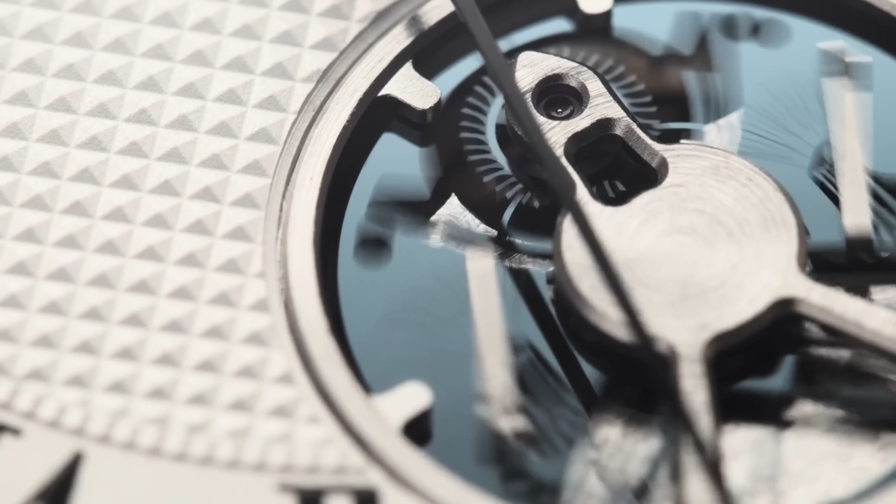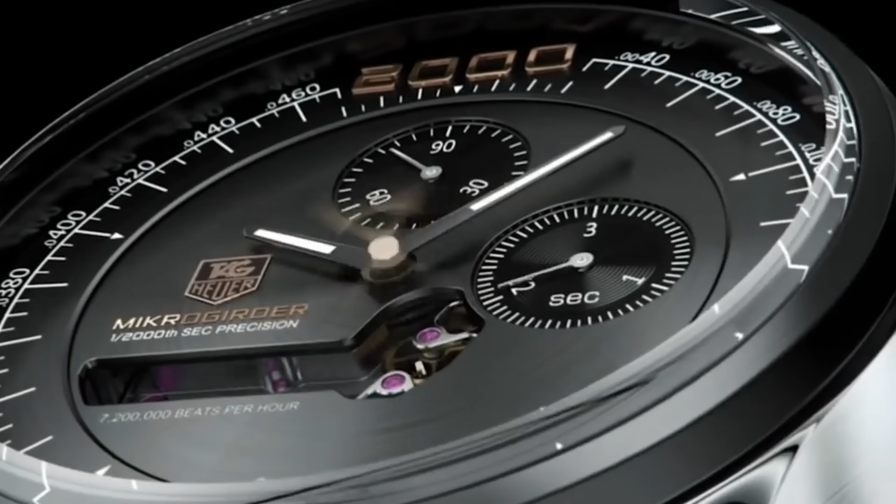Sometimes, while the old men are napping, new notions come out to play. They're few and far between, but in the brief moments they exist, they can be some of the most bonkers things you've ever seen. So here they are, those most ridiculous ideas, laid out for your amusement. Stay to the end for the ultimate cooking hack.

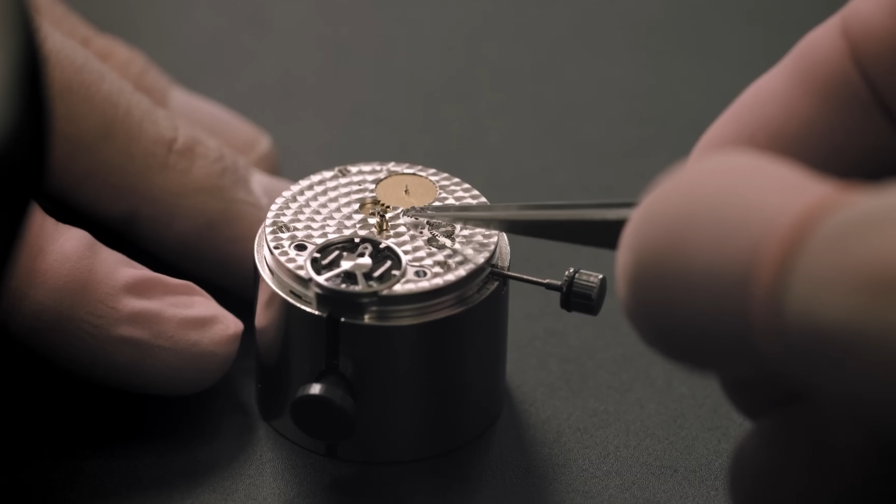If there's a brand out there that couldn't be more old man if it wore New Balance walking shoes and put 2 spaces after a full stop, it's Frederique Constant. The weird thing here is it's actually relatively young, younger than I am, and yet it's been cosplaying as elderly since the day it was born. I suppose it makes sense, really. The best and most expensive watchmakers really are the oldest of old men, and so the aesthetic comes with a certain credibility that can be quite appealing.

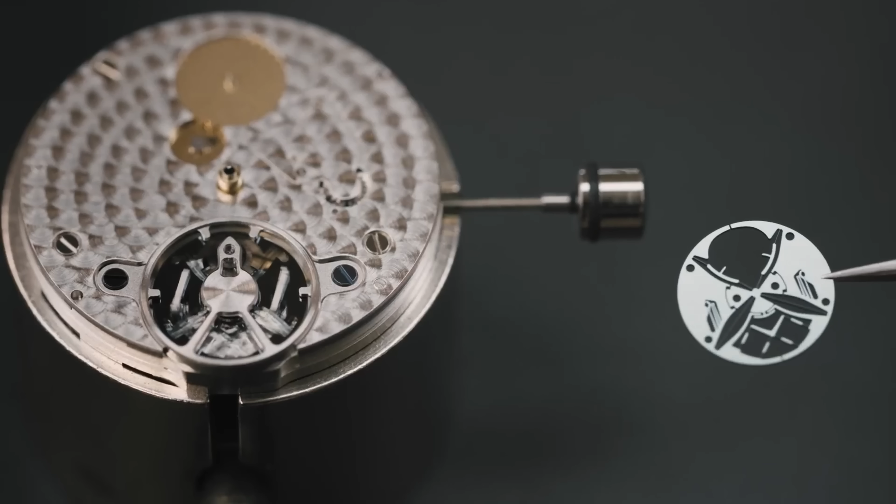So when Frederique Constant slapped us about the chops with the absolutely mental Monolithic, we were all a bit taken aback. Grandad got a new pair of shoes, and it looks like they might be of the Nike Mag self-lacing variety. At the heart of every watch is its escapement, which is most easily understood as a mechanical capacitor. To prevent the big mainspring winding down as fast as it can, the escapement allows just a small amount of energy to be released in discrete repeating increments.

The current solution to this particular challenge has been in popular use since 1769, so naturally Frederique Constant thought it was high time to try something else. Every time it's always chicken chow mein and pork fried rice. They wanted to taste the rainbow.

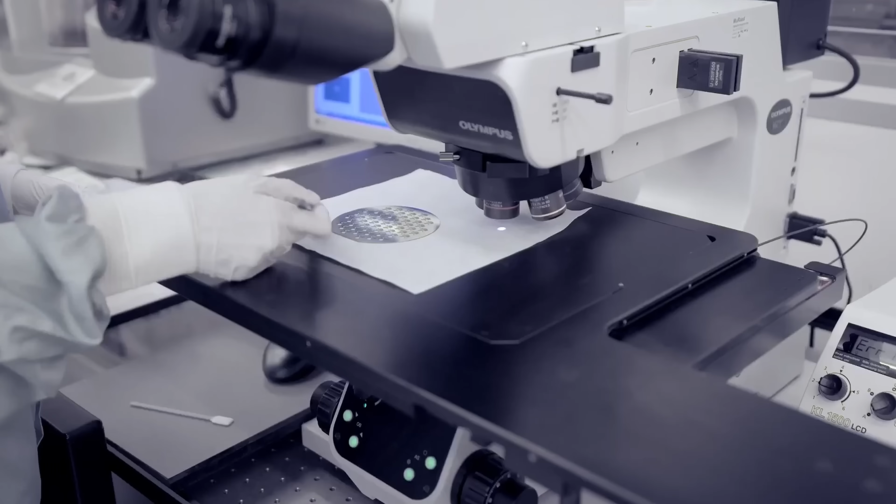In 2001, another watchmaker, Ulysse Nardin, we will be hearing more from them later on, wondered if computer chips might make a good material for watchmaking. And it turned out that yes they do. Not only can silicon be used to replace existing components in a standard escapement, being lightweight, almost friction-free and anti-magnetic, the ability to make highly complex elastic structures with it as well opened up the door to some properly out there thinking. Case in point, this Frederique Constant Monolithic.

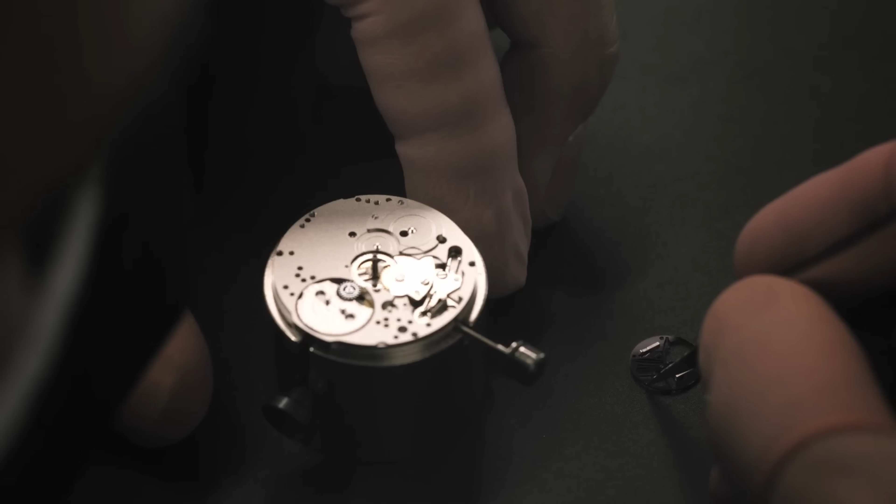Combining both the balance wheel and pallet fork of a traditional escapement, and with 2 adjustable weights either side to dial it all in, the Monolith buzzes like a wasp with an Uzi, the alien structure flexing at 8 predetermined points, each thinner than one of the thinning hairs on my thinning head. And that's just the beginning. As we'll continue to see, the combination of silicon's precision plus the recent ability to model complex compliant mechanisms in simulation makes for some very interesting creations indeed.

But why would anyone except Skrillex want those controlled beats going so much faster? Enter the oldest of old man watchmakers, Breguet, to offer up an answer. Back in the good old days of pre-industry and diphtheria, watches, like the ones Breguet made, used to beat slowly, since the metal alloys used for the mainsprings back then weren't up to the task of lasting long enough.

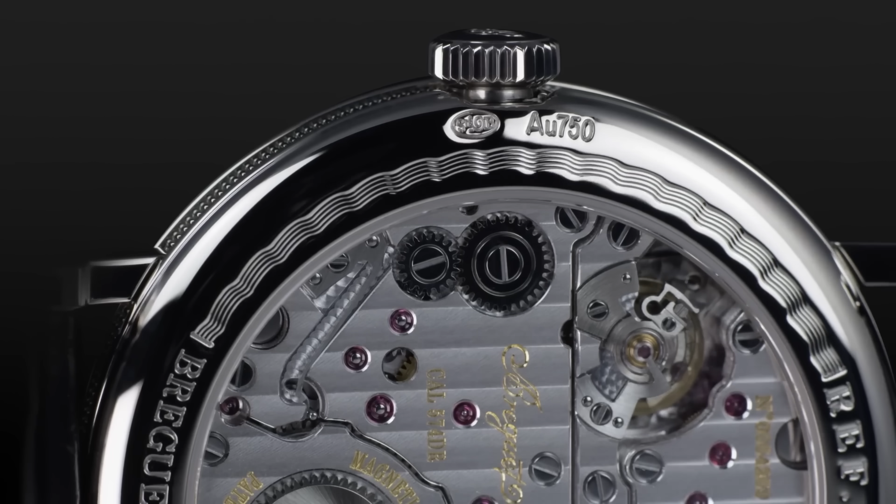We've all been there. Whilst 28,800 beats per hour is today pretty commonplace, pocket watches of the 18th and 19th century ran at anywhere from 18,000 beats per hour all the way as low as 14,400. The clever sausages in the room will have noticed those are all divisible by 3,600, the number of seconds in an hour, offering up from 4 beats per second to 8 for the modern day watches. This frequency can also be measured in hertz, which is read as half the beats per second, since the escapement only achieves a full cycle every 2 beats.

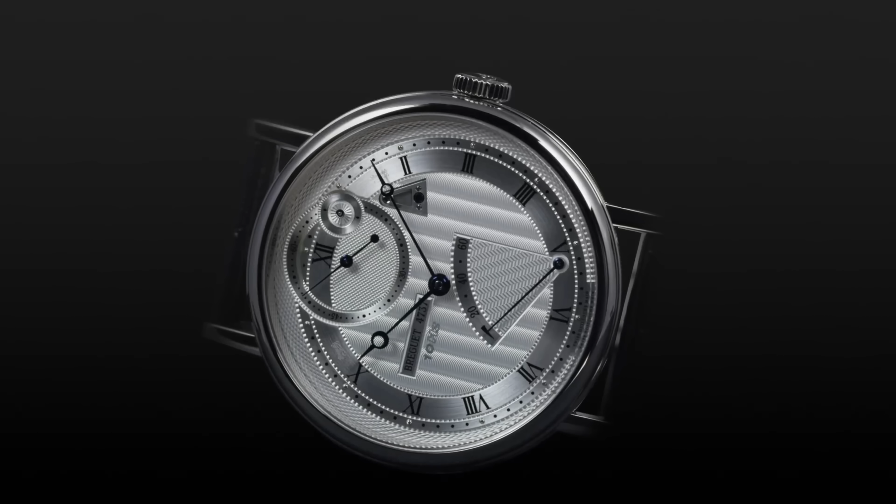Crotchety old man Breguet, when not shooing the neighbour kids off his lawn, spent time pondering the exact nature of watchmaking, and frequency was one of those topics. If you've ever learnt to ride a bicycle, you'll understand intuitively that the faster you go, the more stable you become. The same is true of a watch's balance wheel.

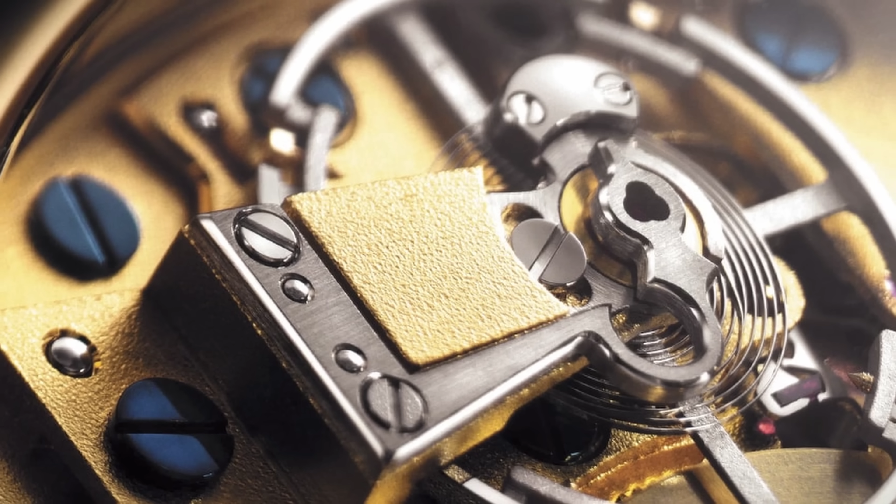Go slowly and one small bump and it'll be knocked off its axle, and then it's grazed knees and tears all round. Breguet partially solved the problem with his parachute shock absorber system, a springy dingle that absorbed bumps up through the axle, but that only got him so far. It stopped the balance wheel breaking, but didn't stop it, well, stopping. For that, he needed to channel his inner Jeremy Clarkson to summon more speed and more power.

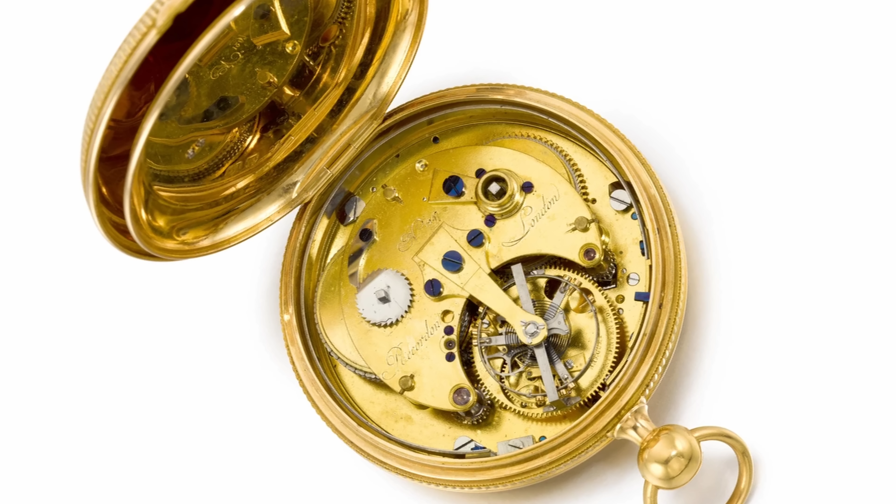In a watch built in 1808 for King George III, Breguet whipped up a rocket ship that packed in a thicker mainspring for a blazing 21,600 beats per hour, 6 beats per second, or 3 hertz.

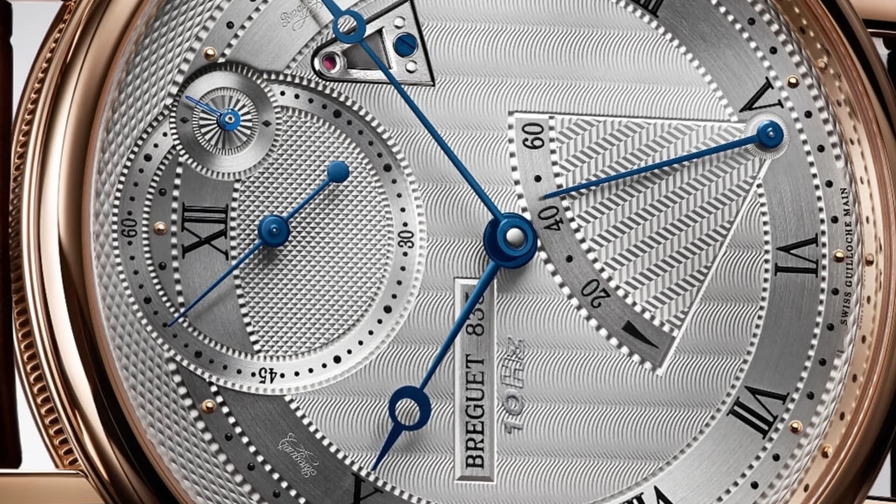And whilst actual old man Breguet is now keeping the worms company, the business has continued to pursue the goal of increased stability, using a methodology even science doesn't truly understand: the healing power of crystals, the magnetic force of magnets. You see, not all of that juicy power from the mainspring actually makes it through the movement, because much of it gets eaten up by greedy friction.

When a watch is measured on a timing machine, amplitude, the total angle of the balance wheel's rotation, determines how much of that power is actually making it all the way through, with friction along the way from the various wheels within it, and its complications, sapping it a bit at a time. It's like a brain teaser for watchmakers, trying to achieve what they want without using up all that precious amplitude.

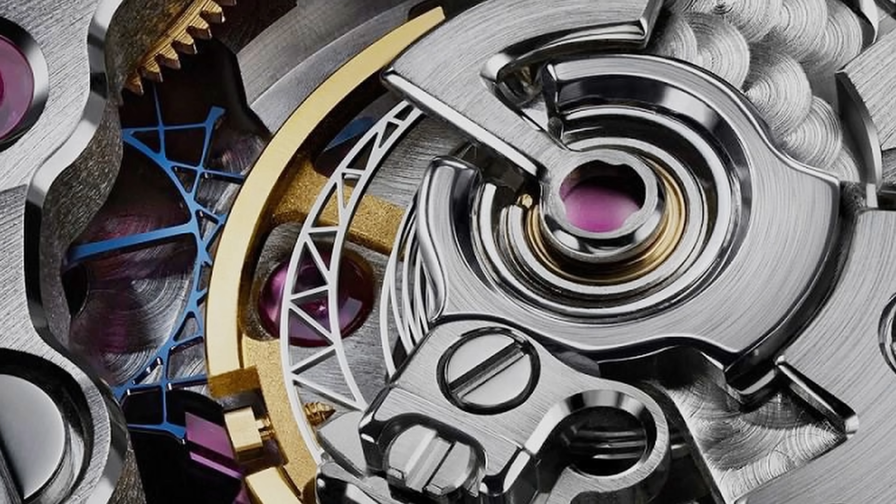One of the biggest culprits in this friction sink is the balance wheel itself, and so Breguet, for the classic Chronométrie 7727 10Hz, which runs at a whopping 20 beats per second, chose to suspend it with magnets instead of seating it in typical jewel bearings.

One side touches the magnet with just the tip, whilst the other side is completely free-floating, which also provides additional shock resistance. But wait, a magnetic attraction minute!

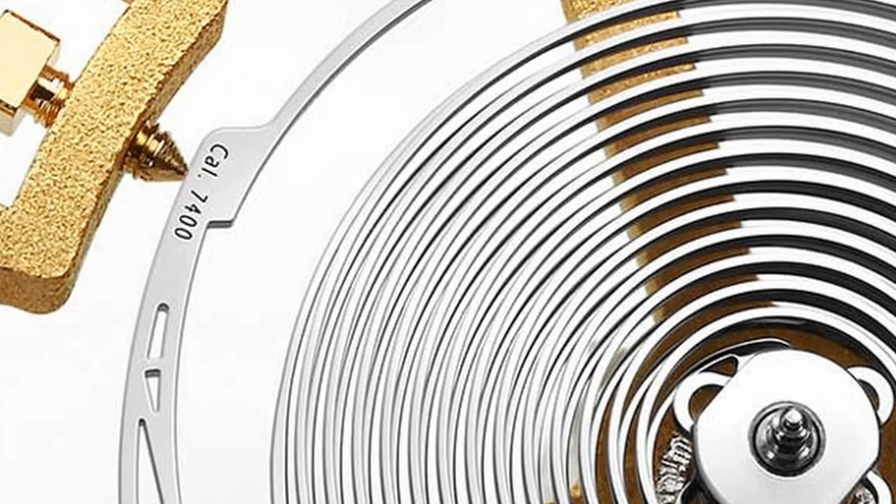Aren't magnets supposed to be the sworn enemy of watchmaking, binding delicate parts together such that you must take time out of your day to visit your local watchmaker and have it demagnetized? Ordinarily, yes, but Breguet wriggled free of that particular sticking point by equipping the watch with an anti-magnetic silicon escapement, including hairspring. The old dog's learnt a few new tricks.

If you were to think off the tippy top of your head which watchmakers waged the technological war closest to the bleeding edge, it probably wouldn't be Patek Philippe you'd think of, except these wily coyotes have been around the block long enough to know a crate full of Acme quartz when they see it.

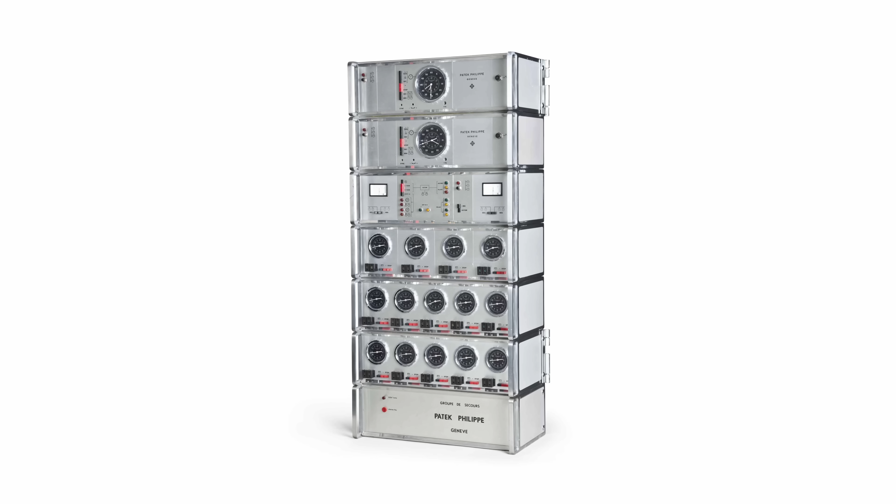Preserving a company like Patek Philippe inherently means experimenting with future tech, if anything as an insurance policy, with the famous watchmaker's history dotted with unexpected creations like electronic clocks, quartz watches, and, just in case, a lifelike painting of a tunnel. The great irony is that its electronic master clock operation, which furnished the likes of TV stations and airports with pinpoint accurate timekeeping, was the part that ended up obsolete as GPS timing took over.

But plucky Patek Philippe didn't give up, and in 2005 began its advanced research program to investigate modern materials and techniques, starting with the material silicon to eventually create a full escapement out of the stuff, inclusive of the pallet fork, escape wheel, balance and hairspring, everything.

The Aquanaut Travel Time Advanced Research 5650G upped the game with the inclusion of Patek's most complex advancement yet, a compliant mechanism reducing the component count in the travel time pusher mechanism by over 3 times. Except this time, it wasn't in silicon.

The problem, as Patek Philippe saw it, with silicon was that it could not be hand-finished in the same way steel could. So they decided to make a complex, highly intricate component ideal for silicon out of steel instead, just so they could make it look real pretty.

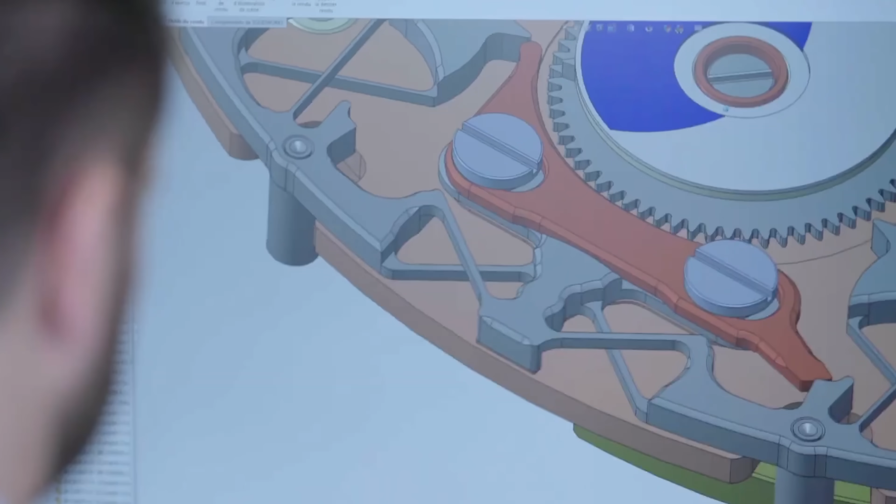This is one of the best examples of the oxymoronic nature of modern watchmaking, introducing innovative new ways to do something as outdated as the medicine at the back of the cabinet. And the more we look at this particular innovation, the more head-scratching it becomes.

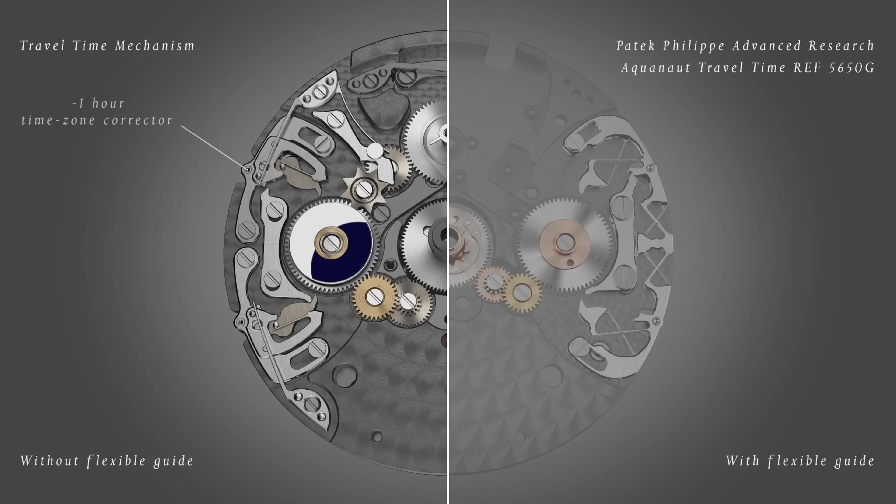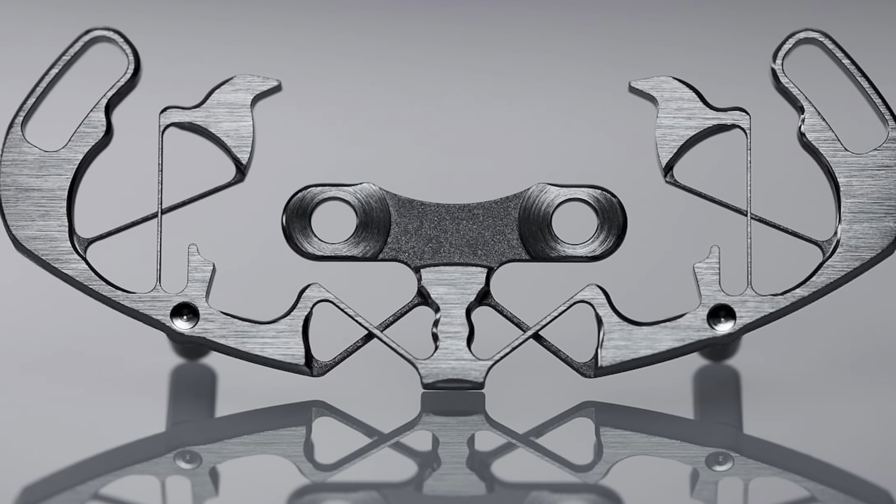What at first looks like a simple single layer turns out to be two, with four skinny angled blades crossed by mirrored versions on the layer below. They're entirely separate of each other, flexing to allow the transmission of movement from the pusher to the mechanism, leaving a gap between them of just 150 microns. You couldn't floss it with a pube, and I wouldn't suggest trying.

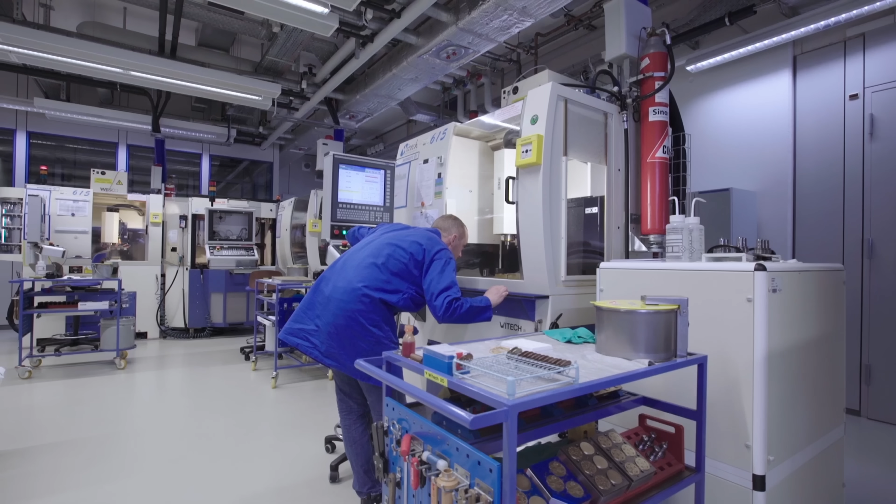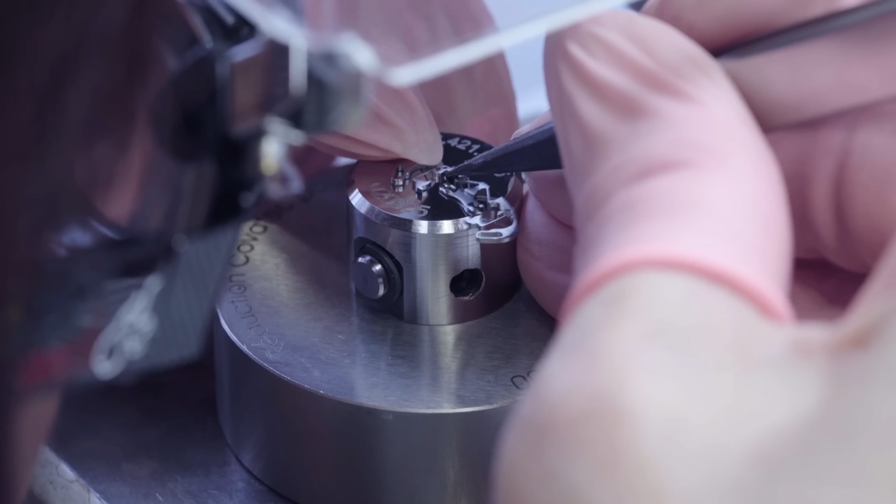How Patek Philippe achieved this is still something of a mystery, the company not delivering on its secrets. There's speculation it's EDM - that means electrical discharge machining. But that process uses a wire, so the complex overlapping shapes wouldn't be possible. Perhaps they're 3D printed, or layered, or perhaps Thierry Stern is a robot from the future where squares have been banned, and he's been sent back in time to put it right.

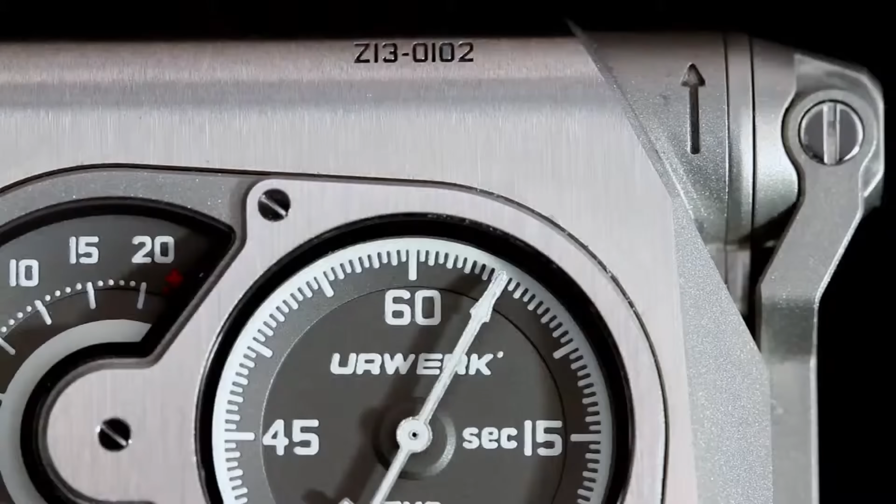The pursuit of precision is the scourge of any watch brand worth its wind, a constant battle to compare itself to the unrealistic standards of a cheap $10 quartz. Chasing this new paradigm achieved by such lowly means could drive a watchmaker mad, and that's why Urwerk took the 'f it, you do it then' approach to high horology and created the EMC.

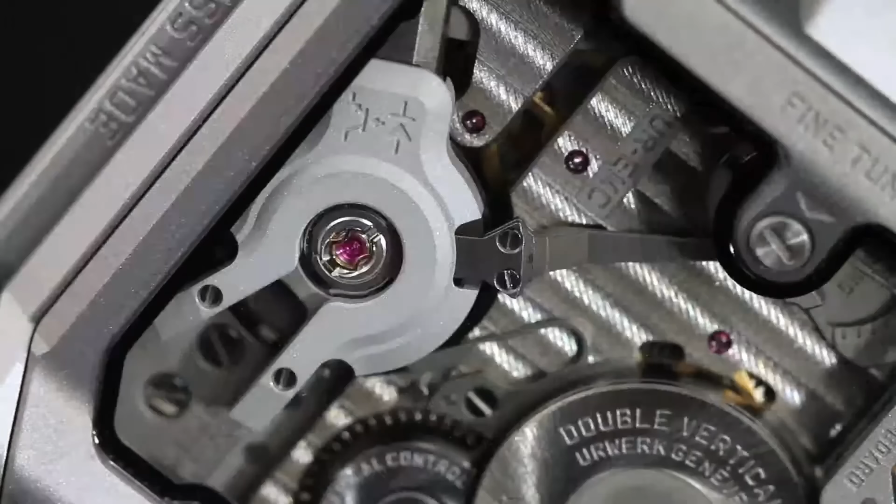Built inside this 80-hour power reserve caliber isn't just a watch movement, but an electronic companion as well, a digital nanny keeping tabs on its horological responsibility, giving it the appropriate title Electromechanical Control, or EMC. Think of it like a probation ankle tag, but for mechanical accuracy.

Press a button on the side and the dial that isn't the seconds, hours, minutes, or power reserve will spring into action, reading out the current accuracy of the watch to within plus or minus 20 seconds per day.

Behind the scenes, an optical sensor reads the ARCAP balance, ARCAP being an alloy developed for high-precision machining typically required in scientific applications, and compares it to a built-in quartz movement, powered by the same twin-barrel mainsprings winding the rest of the watch. I'm not sure which is more ridiculous in this watch, how the power is wound into those mainsprings or how it is converted into electrical energy.

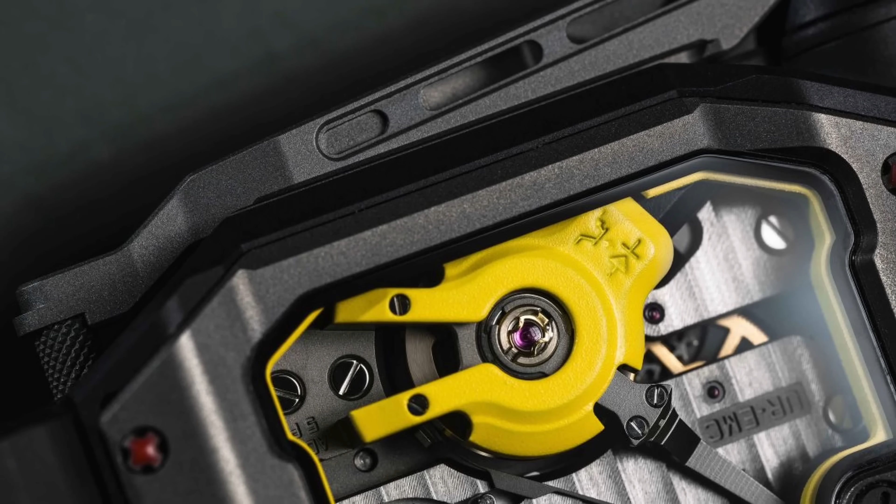So I'll just tell you: a fat crank handle on the right hand side of the watch, like what they used to start up old-timey cars with, is how the power is delivered. How the power is converted, that's via a micro-rotor generator provided by Maxon, the same people who gave not only the Mars Perseverance rover its motors, but the Ingenuity helicopter as well, the first to fly on an alien world.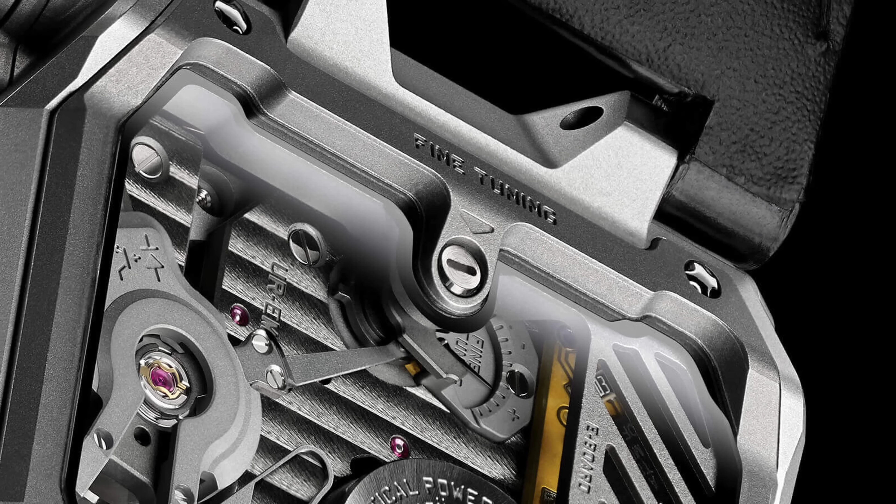What of all this technology though, if just to tell you your watch is keeping shit time? Seems kinda pointless. So Urwerk added one last feature to the EMC, what is perhaps the largest crack in the watchmaker's sanity, a screw. It's usually a screw that's only accessible to the watchmaker regulating the watch, but now it's available to you as well.

Twist it one way or t'other and the watch will beat faster or slower, with the net result of its user's inevitable ham-fisted fuckwittery proudly displayed dial side for all to see.

If I were to hold a Bergeon strap-changing tool to your temple, one of the cheap, scratchy ones, and ask you to pick the least innovative old man watch brand you could think of, perhaps you'd come to the conclusion that the grumpy Frenchman Cartier is indeed that candidate.

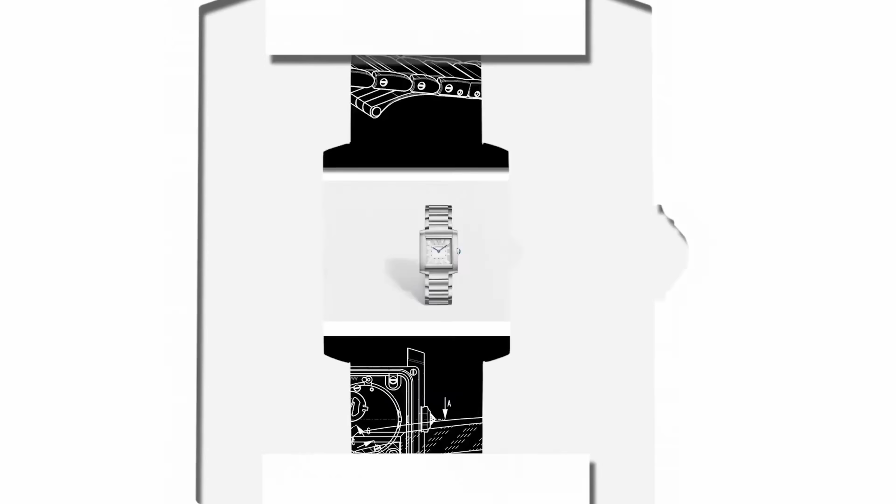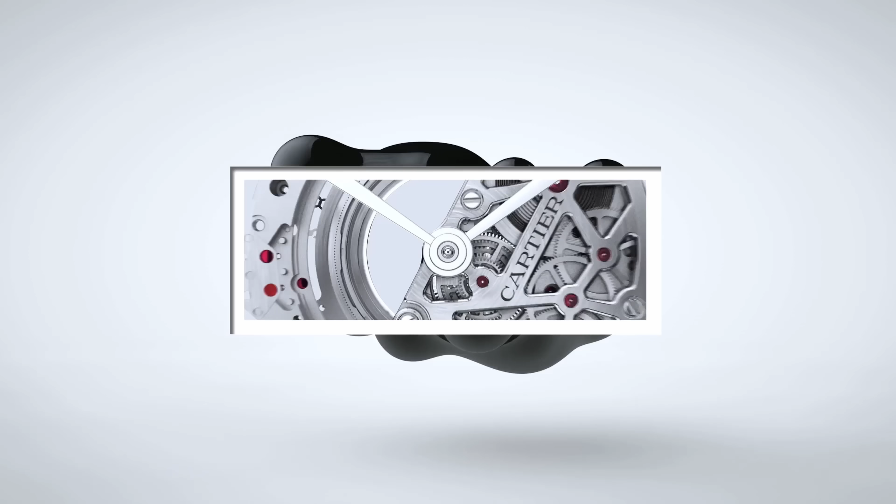In terms of design, they charge ahead of the rest of the pack, producing shapes at varying degrees of viscosity. But when it comes to watchmaking innovation, they pretty much take a back seat and let everyone else do the talking. Or do they? There was of course the recent Masse Mystérieuse, with the only thing more challenging to understand than its spinning self-contained movement being the spelling of its name. However, in terms of innovation, that was more a new idea using existing knowledge.

I'm looking for the stuff they put together in a clean room, in hazmat suits, and keep in the fridge next to the smallpox. And lo and behold, Cartier did indeed oblige with the ID Concept series, two watches designed to imagine what watchmaking might have been like if watchmakers spent more effort innovating than cultivating waitlists and courting Timothée Chalamet.

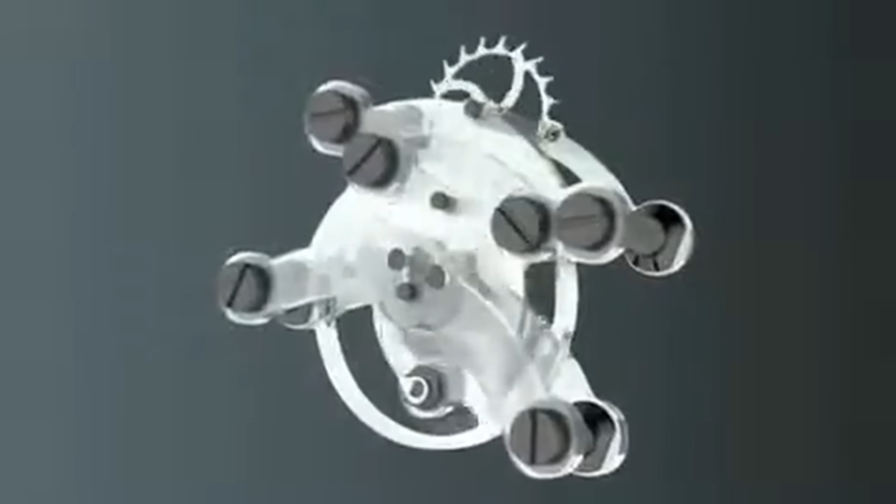The first watch, the ID One, was drier than a nun's chuff, on purpose, requiring zero lubrication whatsoever to operate. Modern synthetic oils last a very long time, but back in the day, natural oils had a nasty habit of breaking down and turning sludgy, which is why watches needed servicing more often back then.

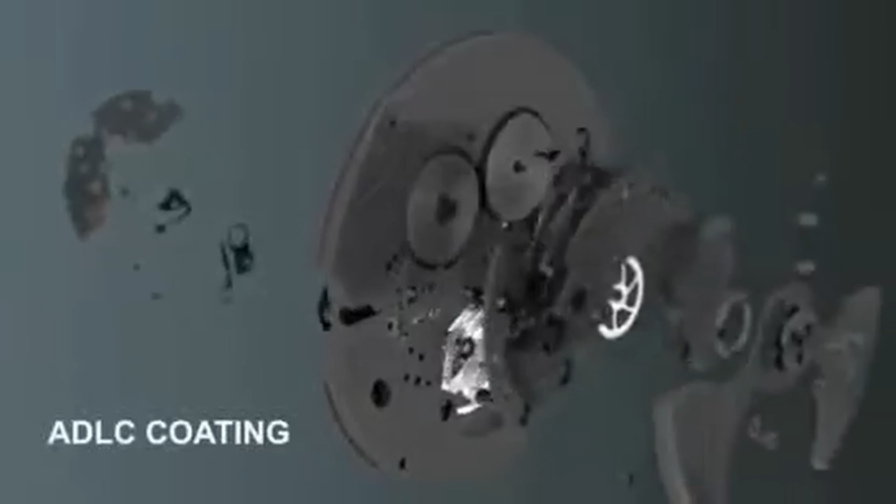The ID One imagined a world where gears could bump and grind together free of the slippery stuff, and this was achieved through the use of carbon crystal. Hang on, isn't the crystalline form of carbon normally called diamond? Yes, and that's what Cartier used for the balance wheel, escapement, bridges, and almost the entire gear train.

Not only does diamond not require lubrication, it can also be artificially produced using deep reactive ion etching, which you don't need a degree in rocket surgery to appreciate is very, very precise. Which also meant the watch needs no calibration either, no fiddling with the regulation to get it bang on. Slap it together, dry as a bone, and it spits out timing graphs that'll give a quartz crystal cause to take out life insurance.

That's already a pretty spiffing endorsement of Cartier's watchmaking capabilities, but there's little point in calling a watch ID One if there's no intention to make an ID Two, which Cartier did.

Building on the concept of imperious efficiency, the nerdlingers at Cartier HQ wondered if this thinking could be interpolated from the long-term operation of the watch and into its day-to-day usage. After all, if a watch is no longer getting bogged down by friction, it should be able to keep on running like Forrest Gump with a Duracell up his butt.

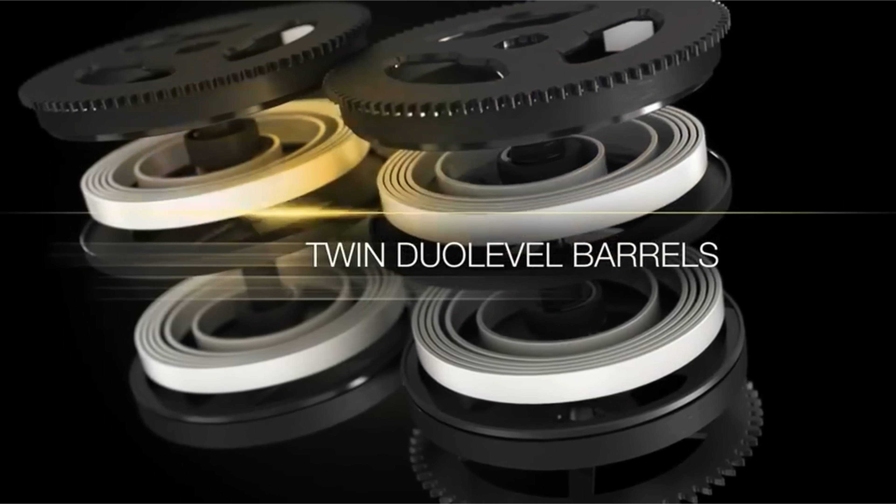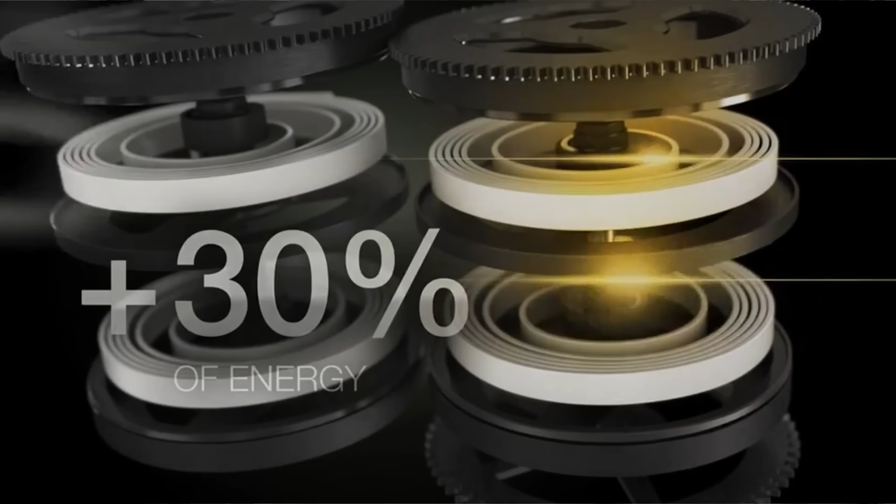So for the ID Two, Cartier kept the carbon crystal escapement, which was friction-free and lightweight, and added two stonking great barrels filled to bursting with fiberglass mainsprings, two per barrel for four total. Why fiberglass? With a polymer coating, they're also frictionless and require no oil, thus extracting more energy from them, not to mention the incredible ability of fiberglass to store elastic energy.

That's why it's used in pole vault poles and Lotus cars, where one is only expected to move a person a few feet down the track before being abandoned, and the other is a pole vault pole. The power from these mainsprings is so high that a planetary gearing system in diamond-coated silicon was created to spread the load over more teeth and stop the whole thing going bang like a lightly used K-series.

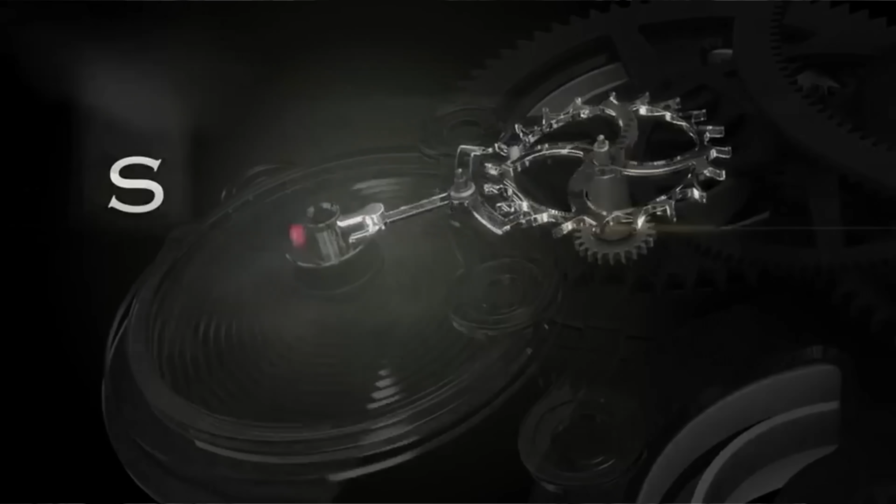But there was more performance yet to be extracted, not in the movement itself, but in the everything else within the case: air. Yes, Cartier sucked that case like they owed it money, leaving it all but 0.02% free of the life-giving gas. That clear ceramic case back isn't glued into place. That vacuum is holding it there.

How much did Cartier manage to eke out the power reserve? 10 days? 15? 20 even? A whopping 32. Perfect for covering any month with a day left over. Although useless in 46 BC when Caesar temporarily added the 33-day month Undecember and the 34-day month Duodecember. Checkmate, Cartier.

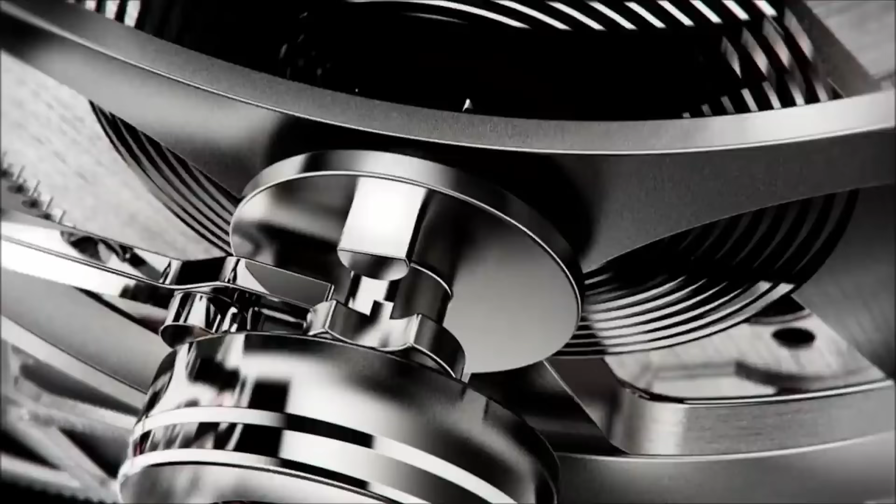If you're not into Formula 1, then first, boo, and second, at certain speeds, springs just can't physically coil and uncoil fast enough. In Formula 1, pneumatic valve springs were introduced, air-inflated bellows replacing traditional metal-coiled springs that allowed engine speeds up to 20,000 RPM.

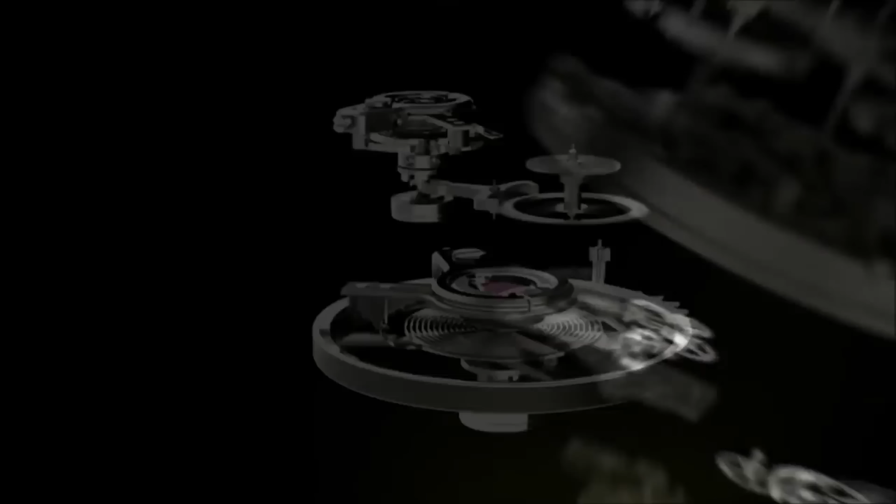For the Tag Heuer Mikrogirder, a similar level of lateral thinking needed to be applied, and this part will blow your mind a little bit, to measure speeds almost 10 times faster than those screaming V10s. And so the story goes, a Tag Heuer engineer was sat at home trying to think of a way to overcome the physical limitations of the balance spring, when his contemplative streak was rudely broken by the twang twang twang of his young child flicking the sprung doorstop.

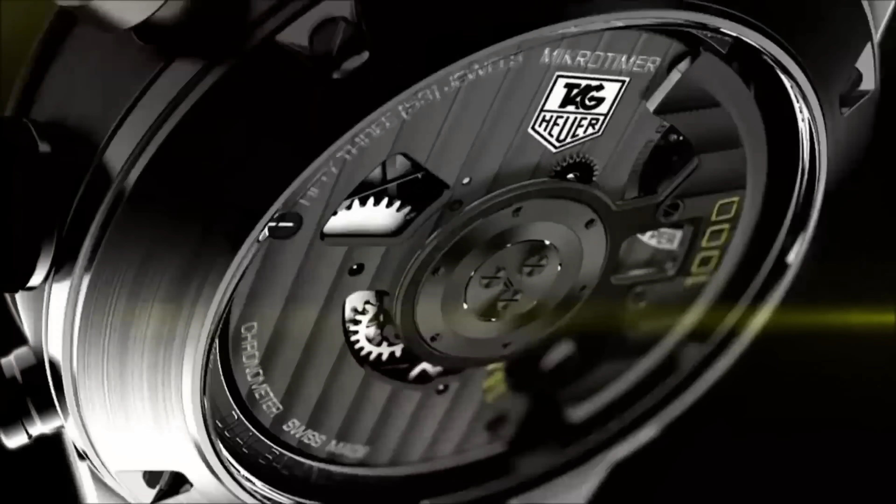It was his eureka moment. Or it would have been if it were actually true. Still, the sprung doorstop analogy is the perfect way to visualize how the problem was solved. When you twang one of those suckers, not only does it fill you with childish glee, it also returns to dead center and even overextends in the merest wisp of a flea's hiccup, bouncing back and forth over and over.

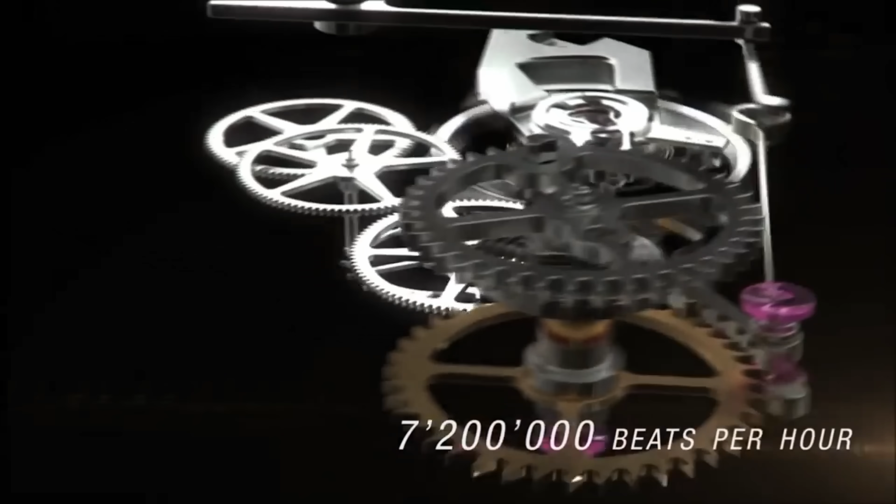And that's exactly what the Mikrogirder is, a linear oscillator that twangs back and forth 7.2 million times per hour. At that rate, the large chronograph hand circles the entire dial 20 times every single second, which, if you can't imagine it, is like sticking the hand on the end of a drill and then squeezing the trigger.

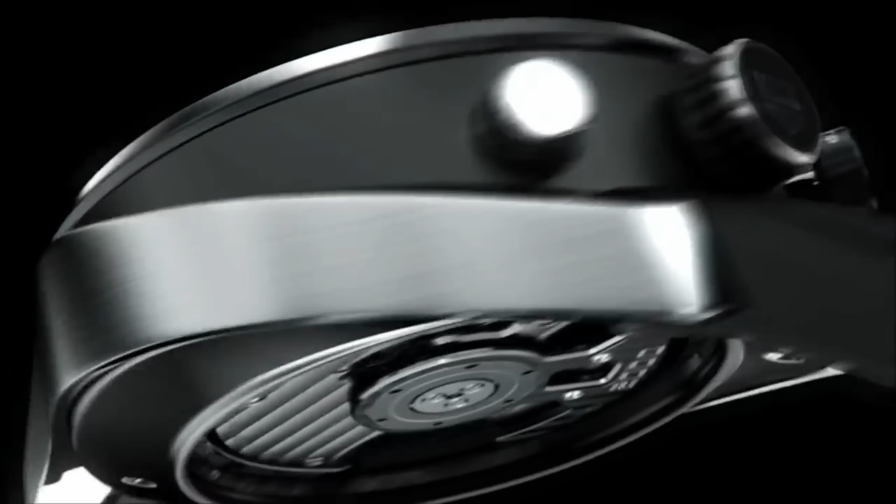Now, you may have also seen a Tag Heuer proudly displaying 10,000 at the top of the dial and be wondering how they broke the 10,000th of a second barrier. But that is in fact a completely different innovation from the house of Tag Heuer known as lying. It's the same 2,000th of a second movement rebadged as 5/10,000th of a second instead.

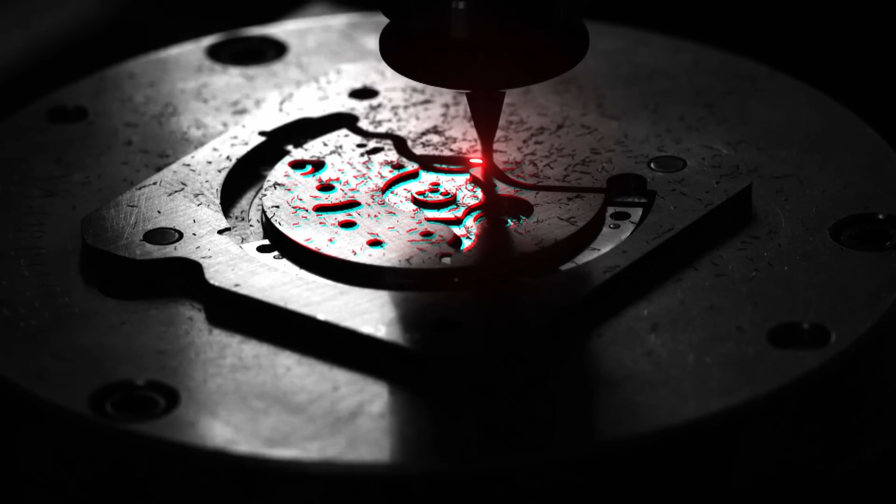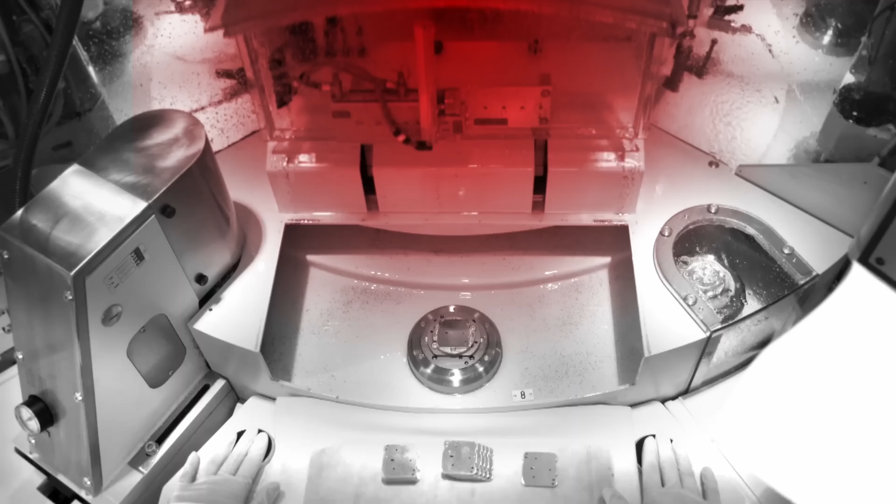To really understand it, I think it requires, in true me fashion, some long, rambling context. As I'm sure it's painfully obvious to anyone who's accidentally stumbled in here from the modern world, all of these solutions have been solved by computers, and that friction, power reserve, lightness, and precision are all antiquated challenges that the rest of the world has long since moved on from.

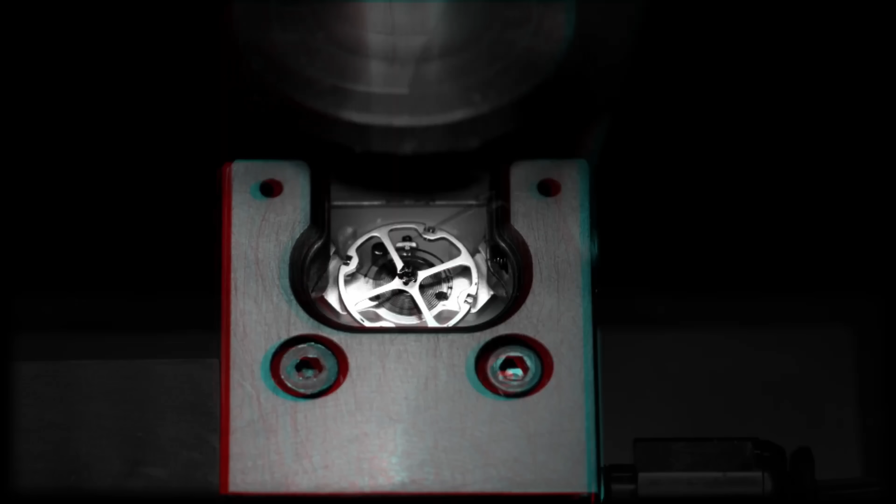There's more advanced management of physics in Rocket League than there is in the entirety of Patek Philippe's advanced research collection. But nevertheless, it continues to be done because not everything needs a reason beyond, I wonder if we can, and that's where the origins of silicon in watchmaking really emerge.

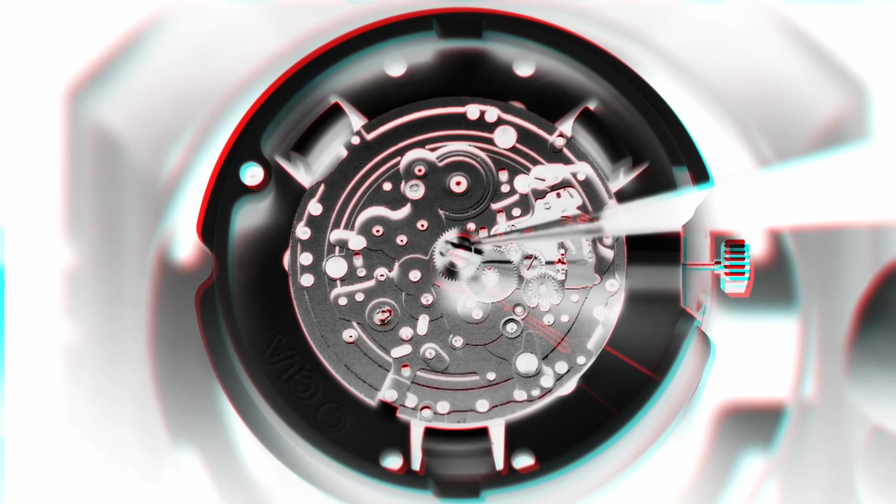When electronics had signed an eviction notice on mechanical watches, it was a scramble to see if this trade could be repurposed in any other way, or perhaps appreciated on a different level.

Ulysse Nardin's Rolf Schnyder, who performed business CPR on it as it teetered on death's door, subscribed to the emerging idea that mechanical watchmaking could evolve to become an artisanal appreciation rather than a practical one, and he wanted to get ahead and usher in that era with a bang on the scale of the universe. A big bang, so to speak.

He originally had the idea of bringing back Ulysse Nardin with something impressive like a minute repeater, but when he went to visit his friend and genius watchmaker Jörg Spöring, he was struck by the astronomical clock hanging on the wall. That was it. He wanted the entire night sky on the wrist, the most complicated astronomical wristwatch ever made.

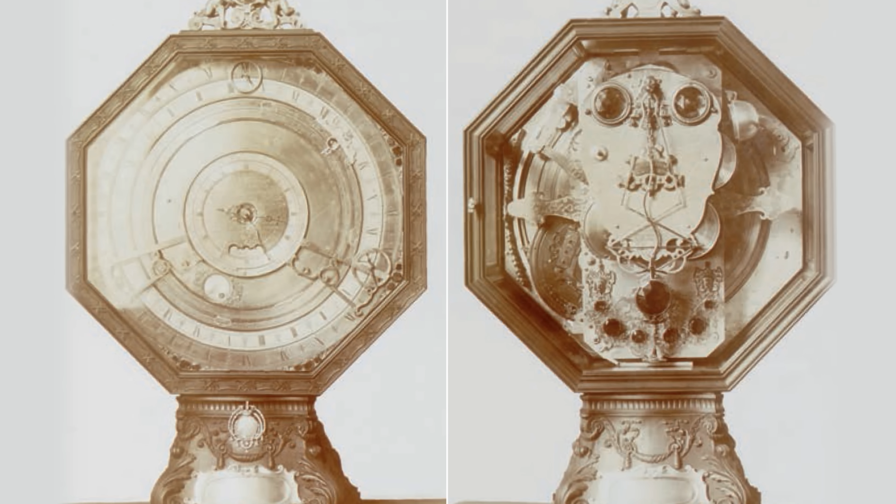Jörg promptly informed him that the clock was not the work of his own hand, but his apprentice, who had decided to spread his wings a bit by offering to fix the Vatican's astronomical clock, which had been broken for centuries, with almost no experience, and despite the clock being deemed unfixable by many masters before it.

Rolf set off to Italy to find this overconfident apprentice, to discover that he had indeed brought the clock to working operation. By taking the clock entirely apart, the apprentice had come to understand it and was able to reassemble it successfully and didn't even have an extra part left over at the end.

Rolf asked the apprentice if he would build him an astronomical wristwatch. The apprentice was confused.

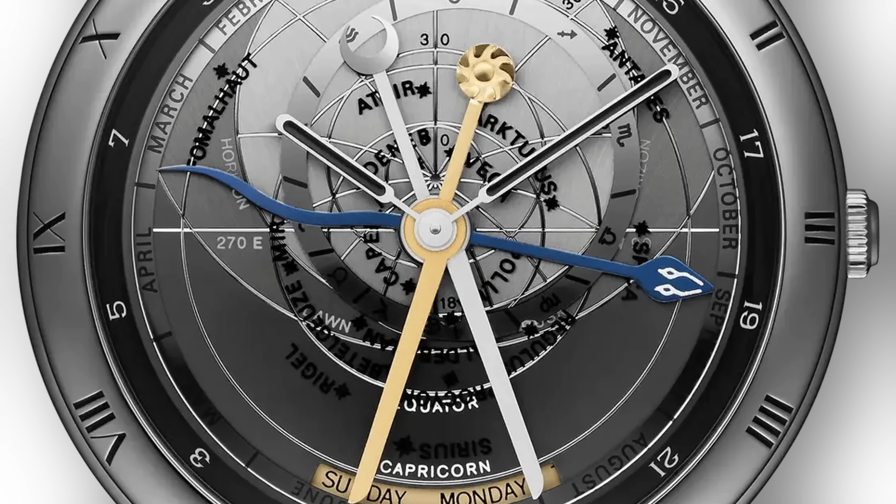Why have the incredible accuracy of an astronomical clock and indeed the universe in a watch too small to read it? Rolf assured him that, for the buyers of this kind of watch, that wouldn't be an issue. And that little boy who fixed the Vatican clock grew up to be Ludwig Oechslin.

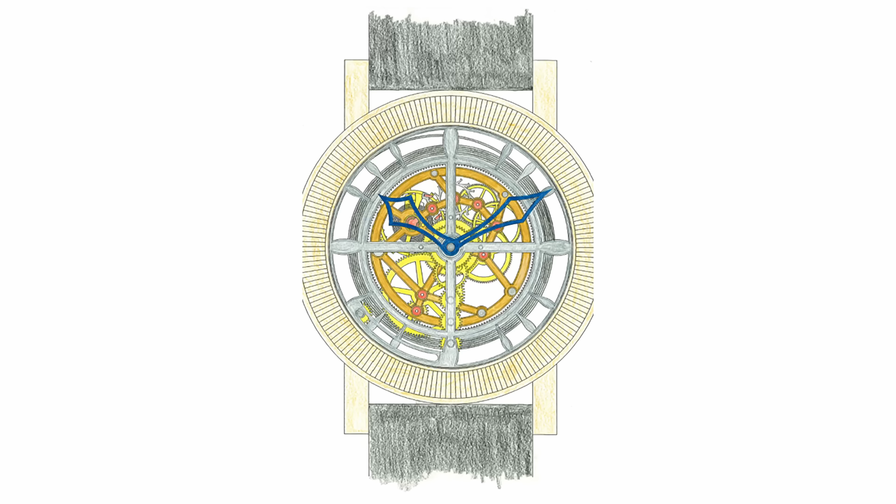Ludwig actually had plans of his own, namely a design that fixed the stability issues of Breguet's failed natural escapement, which is a bit like asking Stephen Curry if he wants to see some real b-ball, then punting him in the tackle. Rolf had just the ticket, an award-winning idea developed by fellow Ulysse Nardin watchmaker Carole Forestier-Kasapi, who would go on to lead watchmaking development at brands like Cartier and Tag Heuer.

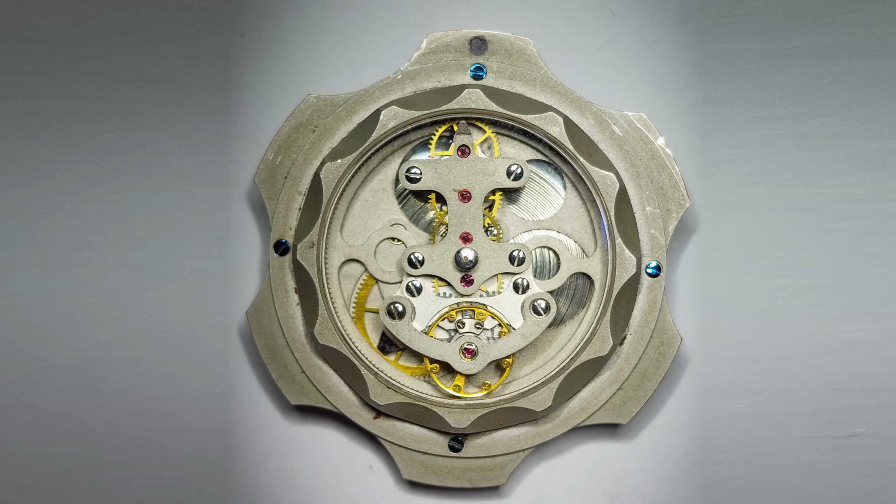The concept was simple in idea but almost impossible in execution. Instead of just rotating the hands, why not the entire movement as well? Turning this idea into a reality proved to be a colossal challenge, and so Ludwig's help was enlisted on the promise he could include his new escapement.

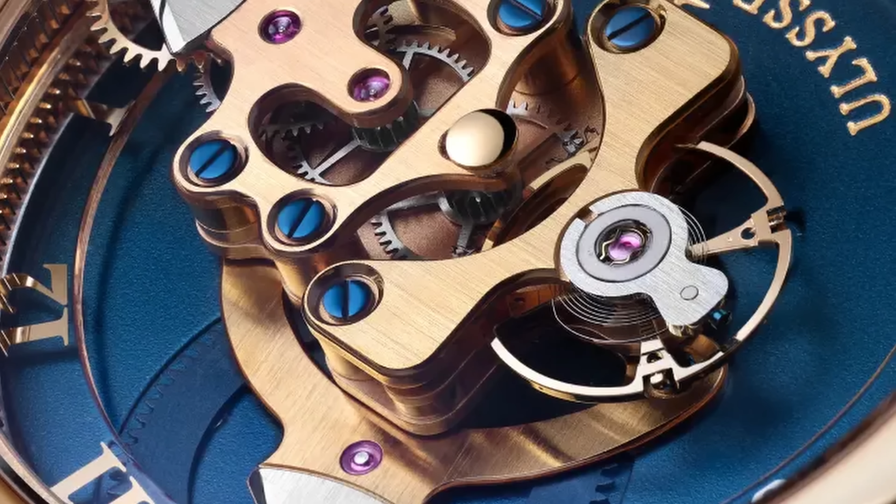The problems with the concept were ironed out, with Ludwig bringing further development to turn this fun but functionless complication into the driving force behind the actual timekeeping.

But there was another challenge. Ludwig's escapement didn't actually work. They could have abandoned it and chucked in a normal escapement and released the watch like that, but Ludwig was set. A watch this freakishly weird needed an even more freakish escapement to go with it.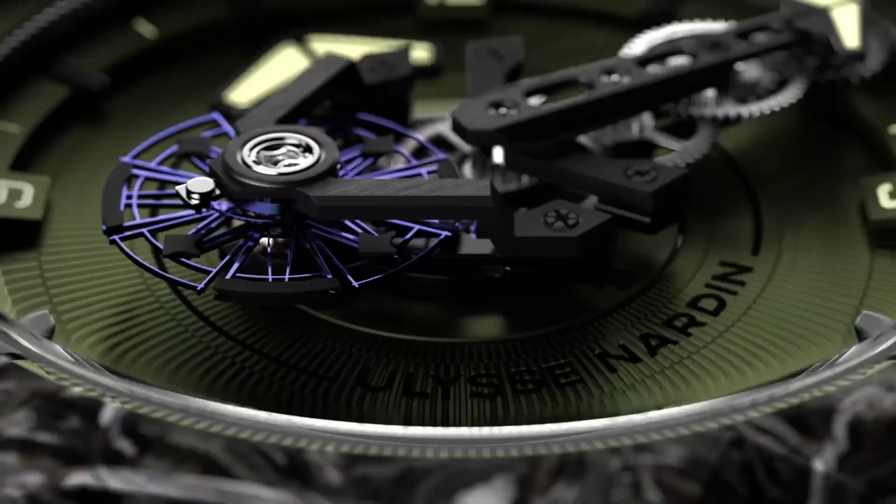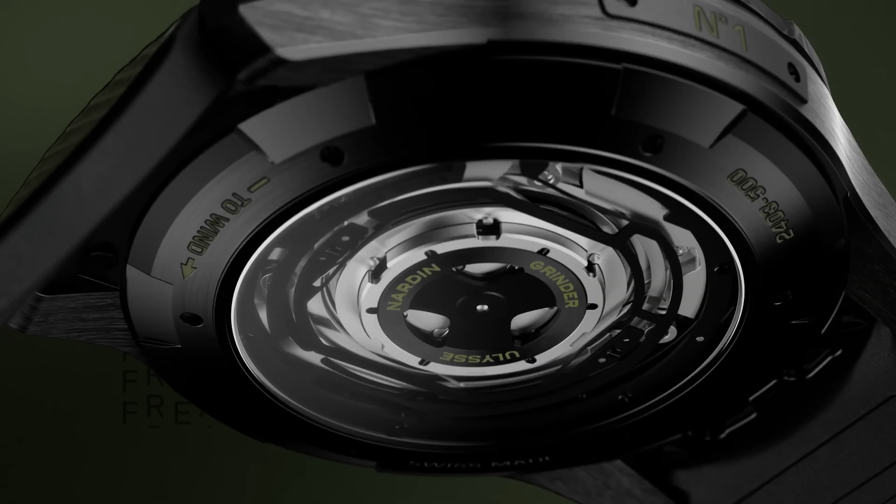There was an answer, it was simply as yet undiscovered, that is until Ulysse Nardin industrial manager Pierre Gygax was tasked with finding it. The problem, it seemed, was that the metal alloys usually used in an escapement were just too heavy. They tried aluminium, but it was too soft.

They tried cheese, but the watchmakers kept eating it. The solution needed a non-watchmaking brain to come up with, and Pierre found it canvassing the local technical schools in a desperate hope for an answer.

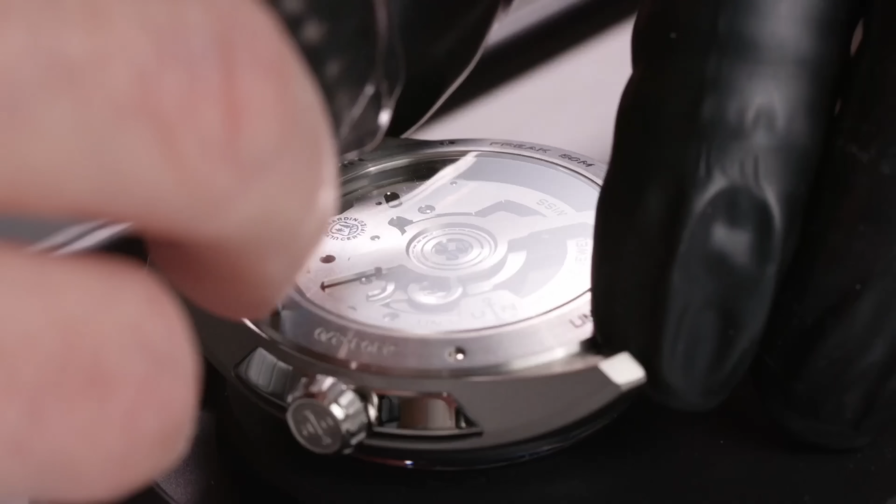Why not silicon, was the engineer's suggestion. Well, first, its production is incredibly complex and technical and scientific and bears no resemblance to traditional watchmaking. And second, did you not just hear the first reason? It's basically a non-starter. But in theory, it is the perfect material.

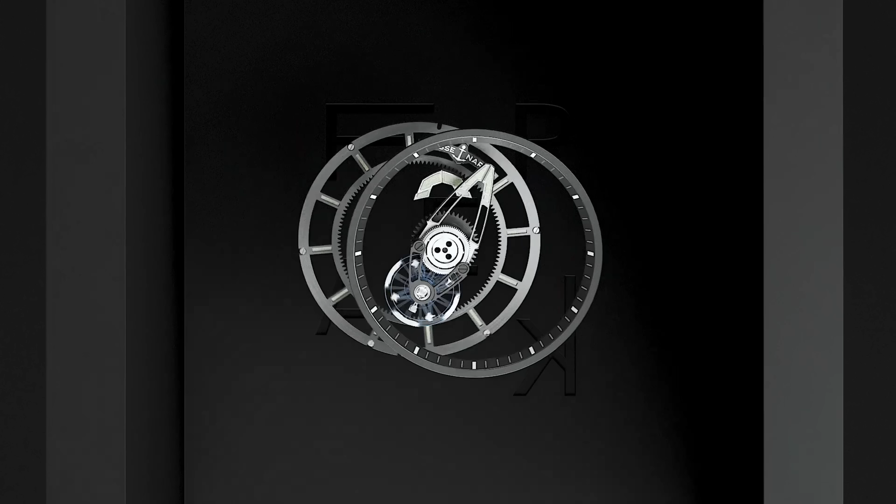Incredibly precise, impossibly smooth and friction-free, very hard and rugged, anti-magnetic, can be formed into complex shapes, and is even elastic in the right configuration. So Rolf said the Swiss watchmaking equivalent of it, and this utterly bizarre material choice found its way into this utterly bizarre watch, the Ulysse Nardin Freak.

That ultimately required not just the investment in the material, but its manufacture as well. And today, Ulysse Nardin, a manufacturer of less than 10,000 watches per year, owns its own silicon factory. That's like a car company having a space rocket division.

And that's the end of that story. Except it's not, because when you've got a silicon factory, you're gonna go and make some silicon. With the Freak Inner Vision, Ulysse Nardin asked the question, can it silicon? And attempted to replace everything that wasn't nailed down inside the Freak with silicon.

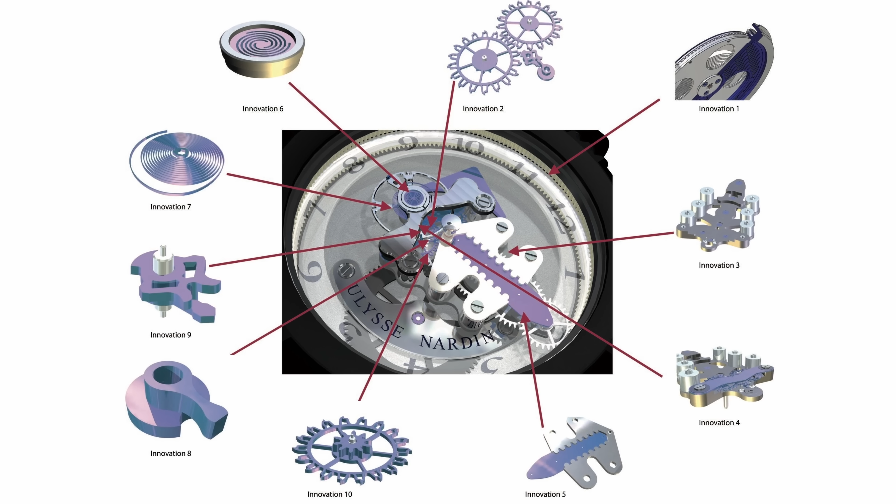The escapement was silicon, of course. The hairspring was silicon. The balance shock was silicon. The barrel bearings were silicon, and even the bridges were silicon, completely removing the need for jewels and oiling.

You can tell this was made by the smartest minds in watchmaking because it didn't even occur to them that it looks like a big purple donger.

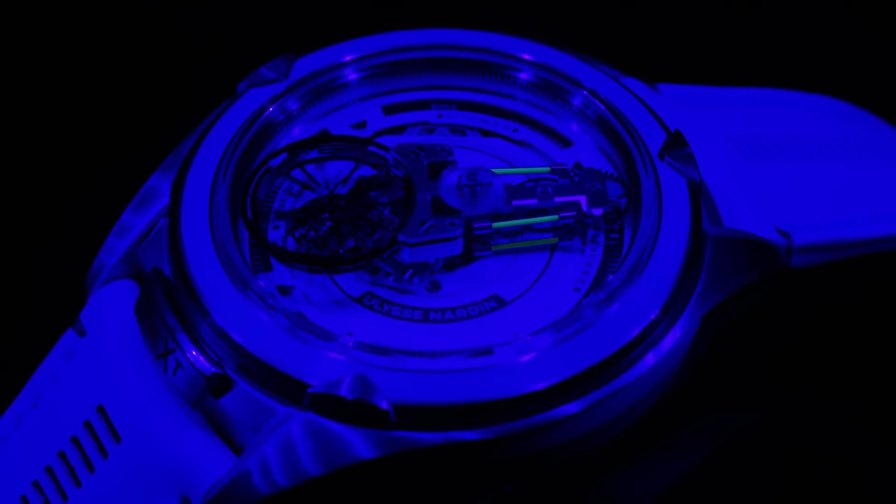Even today, the Freak's journey continues with the ongoing experiment that is the Freak Next. 4 layers of silicon split into 32 compliant blades for a frequency of 12 Hz or 86,400 beats per hour over a 70-hour power reserve.

It's as bonkers an idea as it is to look at, and yet we're back to our first watch, the Frederique Constant Monolithic, that surpasses it for beat rate and power reserve, and for the price of a Tudor Black Bay chrono. Only a few years of development separate the prophetic Freak Next and the younger Monolithic, a rapidly ramping Moore's law of horology started by the original 2001 Freak.

I don't know about you, but I, for one, am excited to see where it goes next.